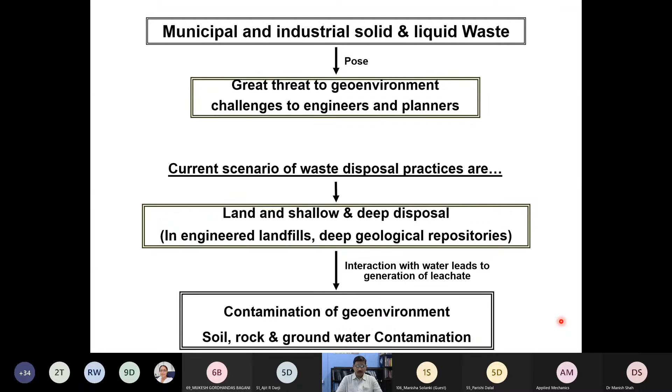If you look at the various layers in this system, we have the waste, followed by a separation geotextile, which may not be present in all cases. The purpose of this separation geotextile is to enhance the service life of the leachate collection system and prevent its clogging.

The next layer is the leachate collection system, basically a bed of gravel where perforated pipes are embedded. The main role of this is the primary leachate collection, using what is called the primary leachate collection pipe, which is a perforated pipe.

In order to maintain the leachate head well within the design level, we generally do not allow it to exceed the height of the leachate collection system—typically around 300 millimeters above the base of the liner. If it exceeds that, there are certain consequences we have to bear with, so we purposefully limit it here.

Following that is a protection geotextile layer, which could be a non-woven geotextile or sometimes a sand layer. The purpose of this protection geotextile layer is to protect the primary composite liner system, which comprises a high density polyethylene geomembrane followed by a compacted clay liner of a certain thickness, or a geosynthetic clay liner of 10 to 15 mm thick.

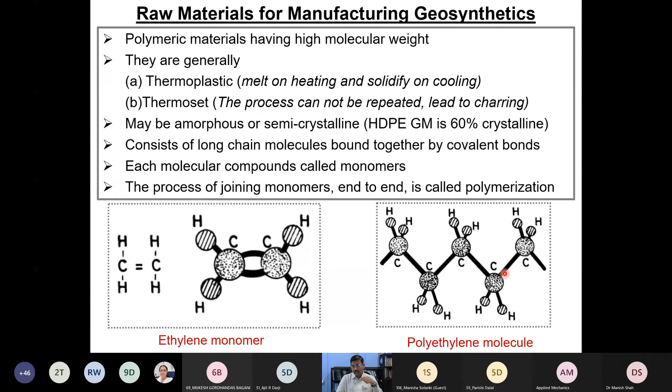The process of joining these monomers from end to end is called polymerization. Why am I talking about this? Because unless you understand a little bit of polymer chemistry - even though I'm not really interested in teaching it here - we need to know how the polymerization process is going to change the service life or aging of a geomembrane.

As I mentioned earlier, most polymers used for manufacturing geosynthetics are plastics produced through a polymerization process. For example, if you use an ethylene molecule, you get polyethylene. If you use a styrene molecule, polystyrene. An ester molecule gives polyester, and so on - we have thousands of polymers available in the industry. However, for making geosynthetics, most of the time we restrict ourselves to 4 to 5 varieties of polymers.

Examples include polyethylene, polypropylene, polyester, polyamide, also called nylon. And then we may talk about EPS, expanded polystyrene. I think all these varieties we may really talk about.

But among all these, if you are really looking at the manufacturing of a geomembrane or the geotextiles, we use two predominant polymers: one is polyethylene and the second is polypropylene. 95% of the geosynthetics are made up of these two materials, which are called polyolefins.

Polyethylene plus polypropylene are called polyolefins. Now, if you understand the behavior of these two materials from a fundamental point of view, your job is done. This depends on the polymer and the polymerization process, what physical conditions you ensure, the chemical environment, and the polymerization technique. There are a wide variety of polymerization techniques - solution phase, liquid, gas phase polymerization, even high pressure polymerization, low temperature polymerization.

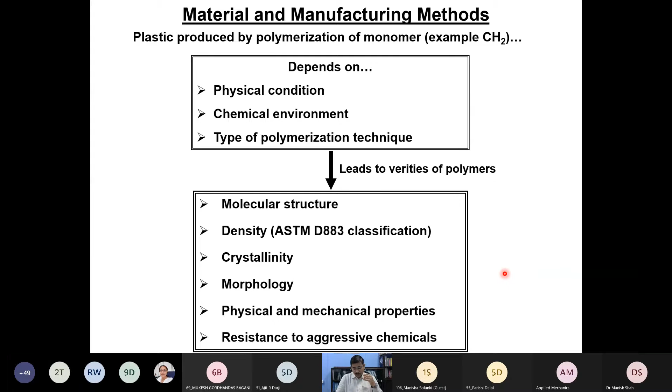All these lead to a wide variety of polymers, quite different in molecular structure, density, crystallinity, morphology. If you change all these properties, your geosynthetic material will have different physical and mechanical properties, and also different endurance against aggressive chemicals. So we need to understand how geosynthetics or geomembranes used in landfill construction are made, and also how the polymer degrades over time.

Since the polymer is made of organic compounds, if exposed to strong solvents or aggressive chemicals, they may dissolve or deteriorate over time. This may not be true when handling municipal solid waste, but if handling industrial waste containing organic solvents, you have to be extra careful with geosynthetic components, because they are made of organic molecules and may dissolve with strong solvents in no time.

Apart from that, there is physical aging. Physical aging doesn't break the covalent bonds between monomers, but the crystallinity changes. I always give an analogy between aging of a polymer and aging of a human being. Physical aging in humans starts around 30 to 35 years, but you don't see substantial change in body or physical activity till you cross 50-55 years. This is the process where crystallinity increases within a polymer.

This physical aging is actually good from a mechanical properties point of view - the stiffness of the material increases, the strength increases. But sometimes it also transforms the material failure mode from very ductile to very brittle. That's not a good sign, because the polymer may break without giving any signs of failure.

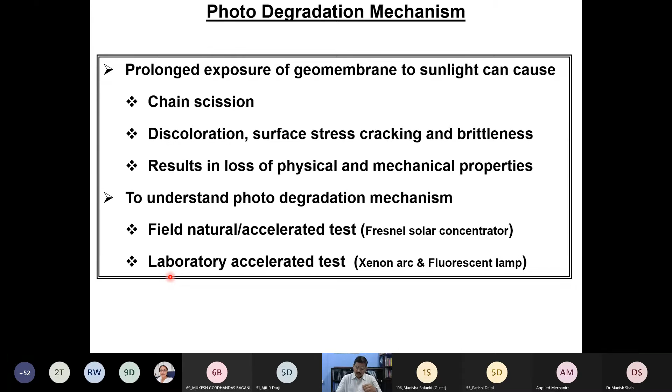We use either Xenon arc weatherometers or fluorescent lamps, because only a significant portion of the sunlight, the UV region, is going to cause degradation. So we use fluorescent lamps which can emit only UV radiation, and we can assess the photodegradation. This is one of the possible ways that people do this in the laboratory, and you need not worry about the testing methodology.

The Xenon arc weatherometer is one of the sophisticated testing methodologies, where you can expose the polymer not only to the UV region, but to the entire solar spectrum. Most of the solar spectrum is covered.

If you don't have too much money, you can go for the UV weatherometer, where you subject the polymer to UVA type, with wavelength region in the range 400 to 315, or UVB from 280 to 315. Predominantly, degradation happens in these regions.

After exposing the polymer to these UV or Xenon arc weatherometer lights, we try to see how the material property, for example tensile strength, changes after exposure to a certain exposure time. We measure the percentage fraction of the material property retained. If the polymer retains more than 80 to 85%, then you say this polymer is really good from a photo degradation perspective.

But sometimes you may not really see this kind of scenario.

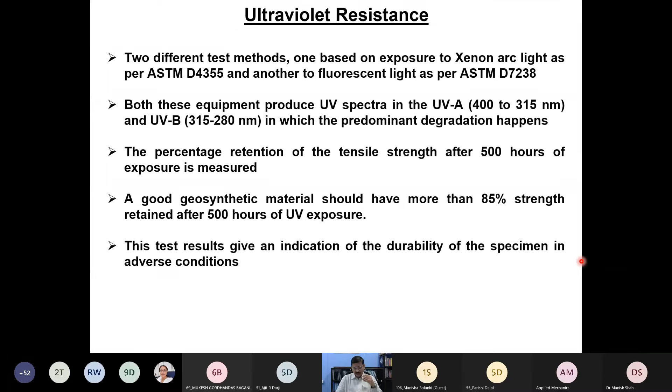But apart from that, when a black polymer, meaning a black geomembrane, is exposed to sunlight - for example, the annual average temperature of Chennai is very close to 35 degrees - but the temperature at which the polymer is subjected to aging, because of the black body radiation effect, may shoot up to around 45 to 55 degrees and above. That's why we have installed a black panel temperature sensor, in order to measure the precise temperature of the polymer.

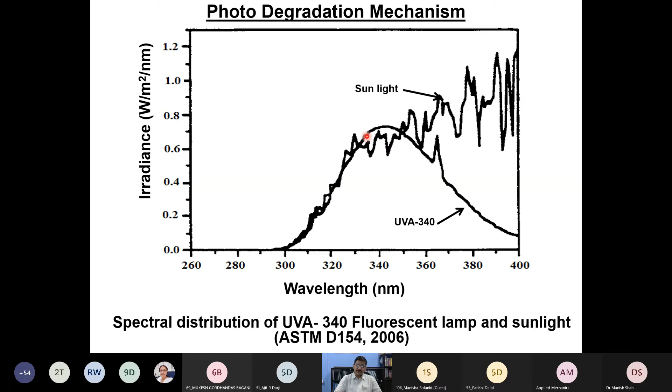If we are unable to really do that kind of long-term field exposure, because we may have to wait for a long period of time, what we can do is simulate the entire sunlight spectrum, or a portion of the sunlight spectrum. If it is UVA, a fluorescent lamp can substantially produce this kind of region of sunlight, though others we may not be able to really do. Given this, we have also purchased the UV weatherometer.

In the UV weatherometer, fluorescent lamps throw a certain radiation of the UV portion. These geomembrane coupons were exposed to the UV light. In addition, this particular system has the possibility to subject the membrane to spraying, to simulate rainwater. So we can simulate the rain effect, and we can control the temperature. Humidity we cannot control, but we can control the temperature and change the intensity. In this particular case, I set the intensity very close to 0.89 watts per meter square.

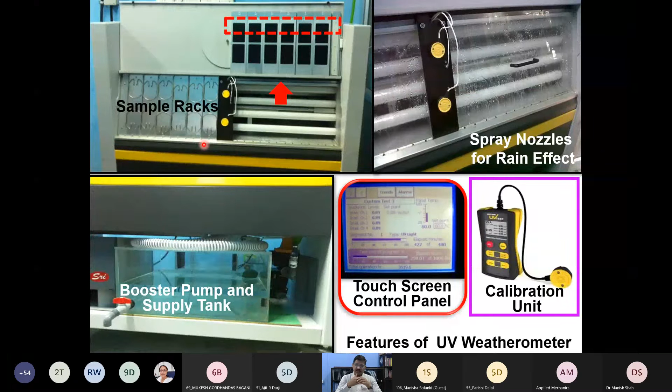We have two radiation measuring sensors here, and at the back of the instrument another two. This particular setup allows us to place around 24 pieces on either side - around 48 samples total. After exposing these materials to the UV light, we can then proceed to testing.

Recently, we got the Xenon arc weatherometer. Instead of using UV light alone, this simulates more or less the entire solar spectrum, using this kind of state-of-the-art equipment, where you can also spray water, and control humidity and temperature.

After subjecting the sample to these environments, at a given exposure time we take out the specimen. We measure the tensile property by cutting a dumbbell-shaped specimen. We can also measure some chemical properties, including OIT - oxidative induction time - and crystallinity. Let me tell you the meaning of oxidative induction time.

Oxidative induction time means that in the manufacturing process of the geomembrane, oxidation is one of the major mechanisms by which polymer degrades. That means if we want to impede that polymer degradation by the oxidation process, we add a lot of antioxidants in the manufacturing process itself.

The amount of antioxidant present in the polymer is measured by oxidative induction time using the DSC, differential scanning calorimeter. This facility we have in our lab, you can really do that.

Further, because of exposure to sunlight for a prolonged period of time, the polymer becomes subject to change. That means the molecular weight of a polymer is also going to go down. So in order to measure the molecular weight, we employ an indirect method called the melt indexer or the melt flow index. We can really measure the polymer molecular weight this way.

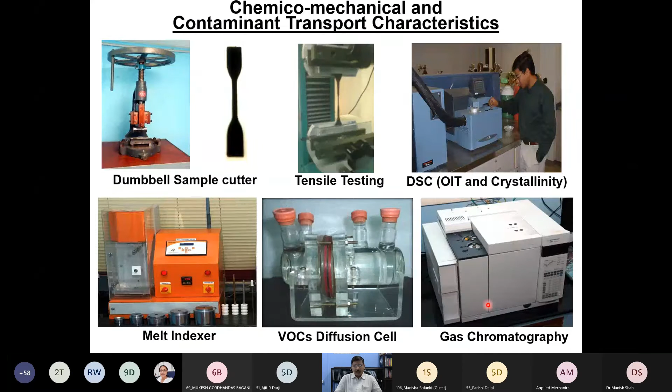So coming back to the mechanical performance of the polymer, even after exposure to a certain amount of this, you will see that the yield point and the break point didn't really change in the case of a polymer. Please note that in the case of a UV weather testing equipment or Q-UV, your sample is exposed on one side to this radiation, the other side is unexposed.

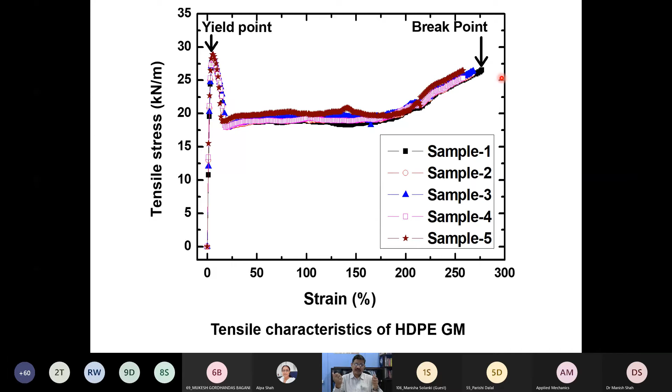So that means the weathering process always starts from the surface, and when you try to test the mechanical property, something like tensile property, the entire bulk material is going to be involved in the process. Meaning thereby, you may not really see the weathering initially by conducting the tensile test.

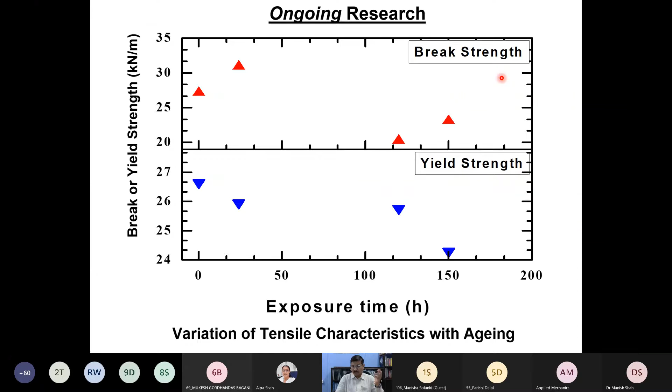In order to capture the surface level phenomena that initiated on the surface initially, and which later propagates into the entire polymer, we deploy the nanomechanical indenter test, which is basically similar to the mechanical indentation you're all aware of, used to measure hardness or some mechanical characteristics of a metal.

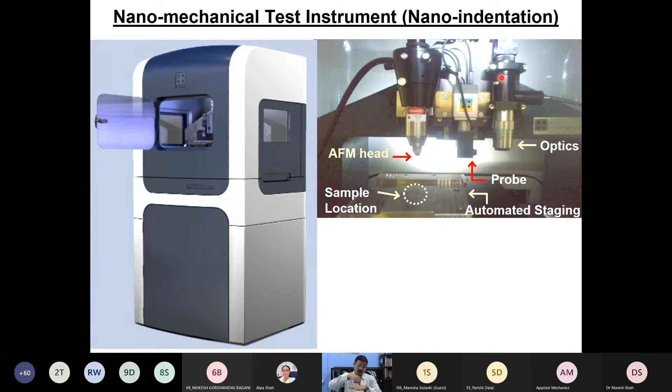The only difference with the nanomechanical indenter is that we deploy a probe made up of diamond, and this probe has a dimension at the nanometer level. That means you poke using the diamond tip on the surface of the polymer, making the depth of indentation in the range of nanometers, maximum micrometers, and the amount of load applied is also in the range of micronewtons, not more than that.

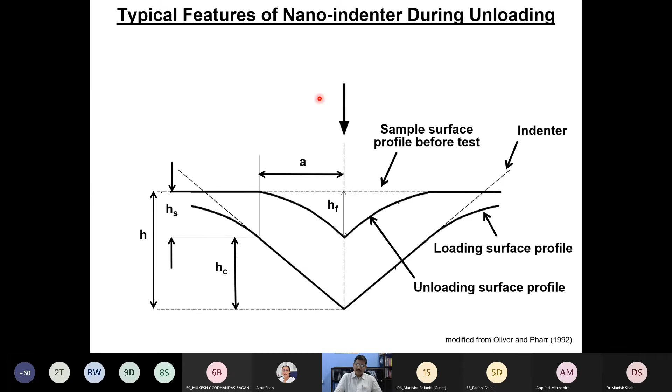How do we do that? This is the kind of surface profile of a nano indenter - this particular technique was proposed by Oliver and Pharr in 1992. So this is the initial surface. After indentation, the surface may get deformed, and then by plotting the depth of indentation versus the amount of load applied, you can really measure some of the mechanical properties of a polymer.

So we took the weathered material, whatever we took out of the weatherometers, and we did the nano indentation using this kind of facility. How do we do that?

So, by doing the nano indentation, you are trying to monitor how the hardness and modulus of a polymer is changing at the surface level, a few micrometers deep, because this is where the polymer is aging - the bottom layers may not be subjected to any kind of photodegradation during the initial period.

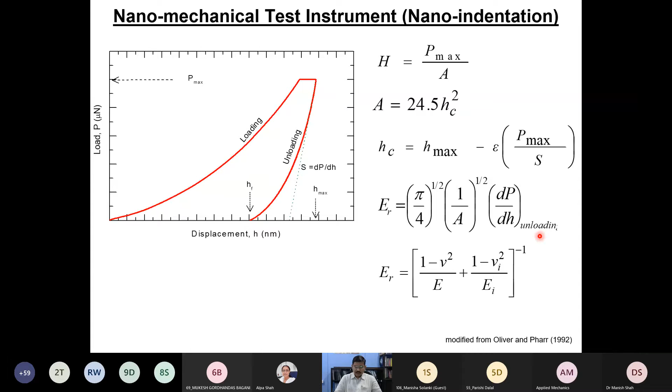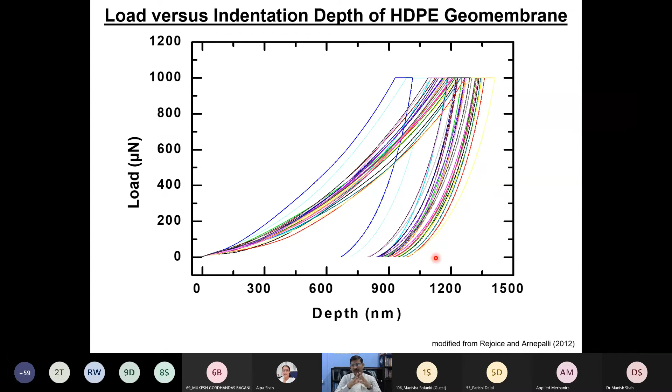At later dates, the entire polymer may be subjected to photodegradation. These are some of the nano indents we made on a small tiny piece of polymer. We made around 25 nano indentations on this, and more or less everything shows the same result. If you look at the size of the sample needed to make 25 indents, it's something like a 25 paisa coin, not more than that. So it's a very, very precise measurement we are able to do.

So we plotted the variation of the role of depth of indentation on the hardness as well as modulus. We optimized this particular depth of indentation to further investigate, and we noticed that there is a change in the modulus.

How do you really corroborate or substantiate the measured change in hardness or modulus value? For that, what we did is, if there is a change in modulus at the surface level, obviously some molecular level changes might have happened to the polymer at the surface. In order to capture these molecular level changes in terms of their functional groups, we used the FTIR, Fourier transform infrared spectrometer.

We tried to see how this absorption spectra varies as a result of the front face, which is the exposed face, versus the rear face, where there is no exposure. So at a given absorbance value, for example around wavelength 1715, if the exposed area shows this absorbance value increasing, that means something is happening to the polymer at these regions.

Once polymers degrade over a period of time, they initially have certain functional groups - for example in polyethylene, the CH functional group is more predominant. Upon degradation, the carbonyl group becomes more dominant. When the carbonyl group becomes more dominant, that means aging of the polymer is taking place.

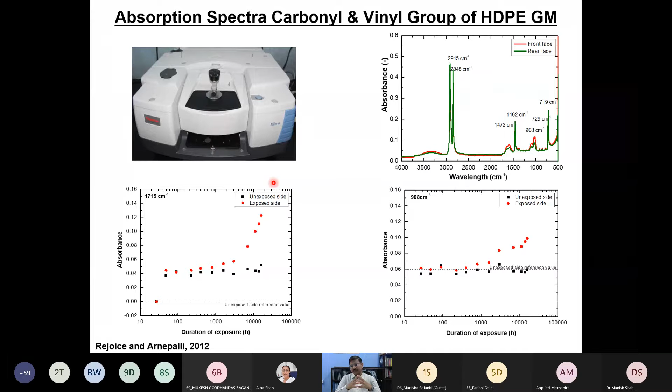This is one way - there is a term called carbonyl index. We can use this parameter to capture the degree of aging, and we try to quantify that in terms of the FTIR.

Further, we also try to see how the crystallinity of the polymer changes once exposed to photodegradation, and whether the change in crystallinity is really reflected in terms of the stress crack resistance.

There is an apparatus called the environmental stress crack resistance apparatus, which we fabricated at IIT Madras. It's a very simple test, using something like a dog bone sample. These dog bone samples are subjected to a certain amount of loading using a lever system.

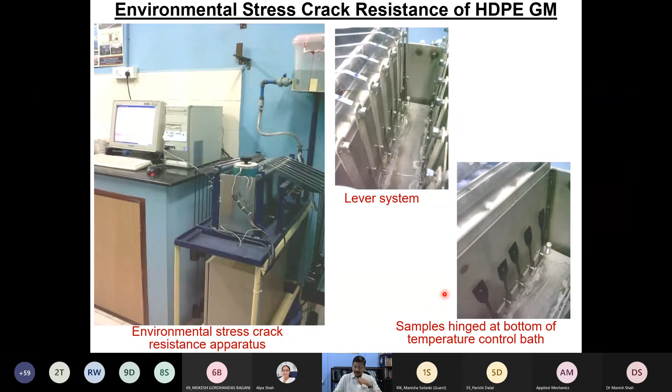Before loading, what we do is purposefully make a small tiny cut on the polymer. Then we subject this cut to tensile load, a certain degree of loading, and then we immerse the entire thing into detergent solution.

As a result, at one point in time, your polymer no longer fails by elongating a long way, but instead fails in a very brittle way, something like a biscuit. So this also tells you whether the failure of a polymer is going to happen in a ductile way or in a more brittle fashion, from a stress crack point of view.

This is also going to happen in your geomembrane when it is subjected to high tensile stresses due to indentation or any other process in the landfill. You may not be able to see the polymer has failed, but however, this phenomenon is going to happen.

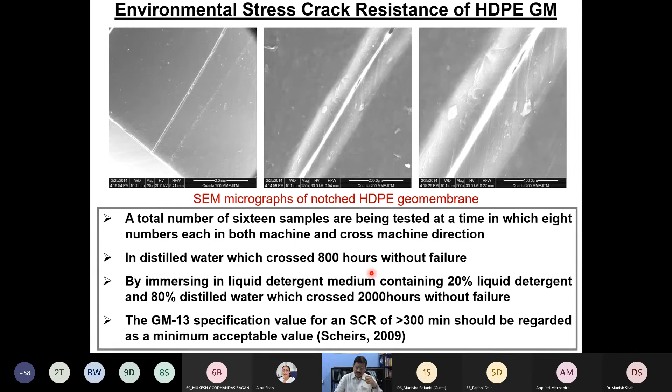So the next process - we've talked about the photodegradation process - the next process is called swelling. I told you very clearly that polymers do swell upon absorption of water. A molecular level absorption of water will take place on the surface, and that leads to the process called hydrolysis.

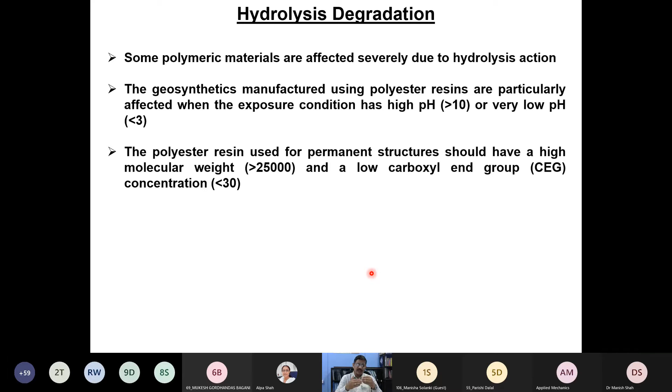This process is always very dangerous, particularly in case of polyesters. When the polyester geotextile is exposed to high alkaline or high acidic conditions, this kind of phenomena is going to be one of the crucial ones.

So till now we have talked about swelling and photodegradation. Later on we will move to oxidation. As I told you in the beginning, in order to retard the oxidation process, we deploy some amount of antioxidants in the manufacturing process.

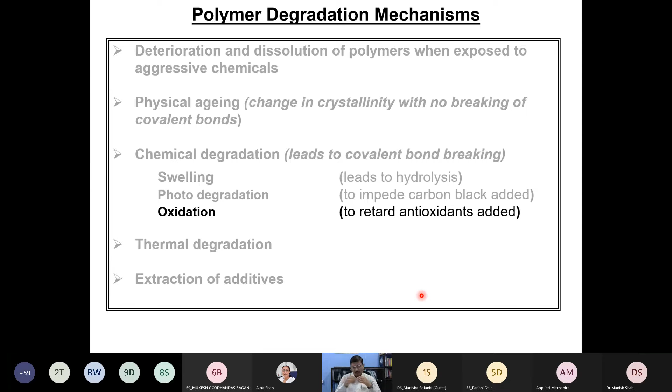In order to understand the oxidation phenomenon, let us investigate the polymeric oxidation cycle a little more clearly. In the manufacturing process, even though we are joining monomers to make long chains of polymer, the process always leaves some amount of free radicals in the polymer.

This is true even in the case of the human body. We do have free radicals, and we also age over a period of time. But at some point, our cells' rate of growth is much higher than the degradation or depletion rate. As a result, you may not see aging in a human until about 50 or 55. Afterwards, this process dominates.

So the free radicals, upon interacting with the free oxygen available in the water, or the dissolved oxygen available in the leachate, end up producing another aggressive free radical called hydroperoxide. When the peroxy radical interacts with the polymer chain, it will dissociate into hydroperoxide, and then this hydroperoxide will again dissociate into a free radical and OH minus.

Once this process starts, it is something like a cyclic process. This is called the primary oxidation cycle, and the outshoot of that is called the secondary oxidation cycle.

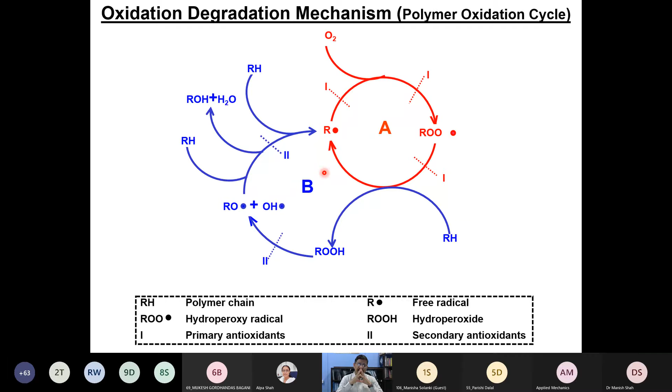In order to control these primary and secondary oxidation cycles, in the manufacturing process we induce primary antioxidants and secondary antioxidants. So we can always quantify the polymer oxidation process by measuring the quantity of antioxidant left in the geomembrane at any given point of time. This can be measured using oxidative induction time, or the OIT value.

So that is how oxidation happens in the case of a landfill. We know the process by which it can happen. But is the process the same in the case of a landfill, or if the membrane is simply immersed into a leachate of certain concentration, certain temperature, certain chemical activity that we maintain? Earlier, most of the oxidation phenomena was studied on free membranes just dipped into leachate.

However, if you look at a given landfill base, your geomembrane is not only subjected to chemical leachate, but also to thermal effects. Because of the decomposition of the waste, the temperature of the basal liner may increase to even up to 85 degrees. This is quite possible; 55 is quite common.

So that means your membrane is subjected to aging because of the physical loading caused by the weight of the waste, the thermal loading from the decomposition of the waste, and the chemical loading from the leachate composition. This means you need to investigate the combined influence of physical, thermal, and chemical loading — the synergetic effect needs to be taken into account.

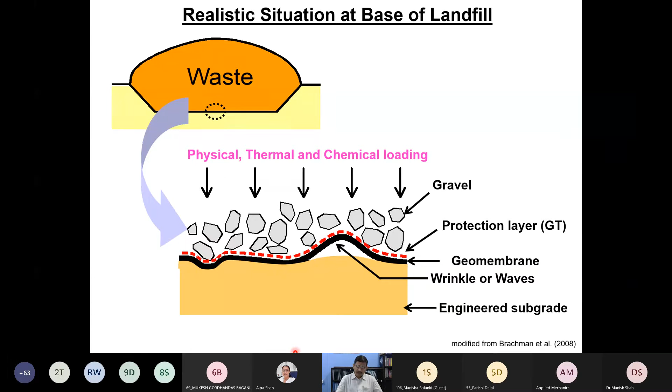As a part of my postdoc at Professor Kerry Rowe's lab, we developed this facility called a geosynthetic liner longevity simulator, called GLLS. This facility is basically a pressure vessel, a metallic body, almost 0.5 to 0.6 meter diameter and 0.5 meter height. The weight of the entire cell, after putting everything together, may be very close to 1.2 ton.

But the beauty of this particular cell is you can simulate the various proportions or configurations of your liner system.

I can simulate a wrinkle. I can place the leachate collection system and maintain the leachate head well within the zone, and we can recirculate the leachate the way it happens in the landfill. We can maintain the temperature of the geomembrane and other components using a heating cable, and afterwards we put a nice insulation jacket. The physical loading we can apply is up to around 1.2 megapascal.

In order to do that, a rubber membrane has been placed. By inflating the rubber membrane, we push the gravel particle downward, and as a result we can measure the level of overburden pressure acting on the membrane.

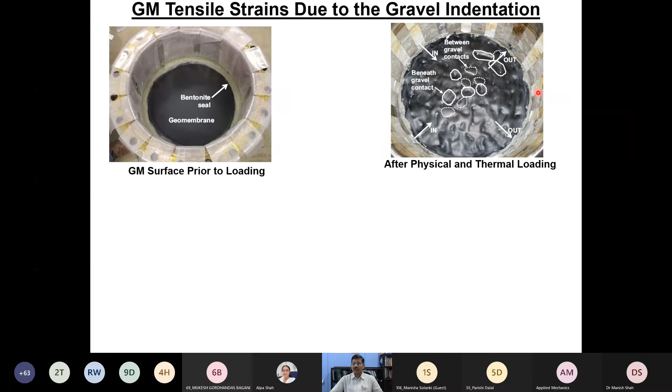So meaning thereby, we want to really see what happens for the indentation, because the gravel particle is pushing and the indentation is formed. Suppose we want to measure the strain below within the geomembrane - how do you capture that? Because if I remove the load, due to elastic rebound, the geomembrane will go back to the original position, or at least rebound a significant portion of the strain.

To capture the in-situ strain, we placed a lead sheet below the geomembrane. When indenting, the geomembrane pushes the lead sheet downward, creating indentations. So even after removal of the load, the geomembrane may rebound back, but the lead sheet does not rebound. We capture this by freezing it into plaster of Paris, and using a line laser we digitize the indentation. Then, using a protocol proposed by Rowe and others, we capture the tensile strain within the geomembrane.

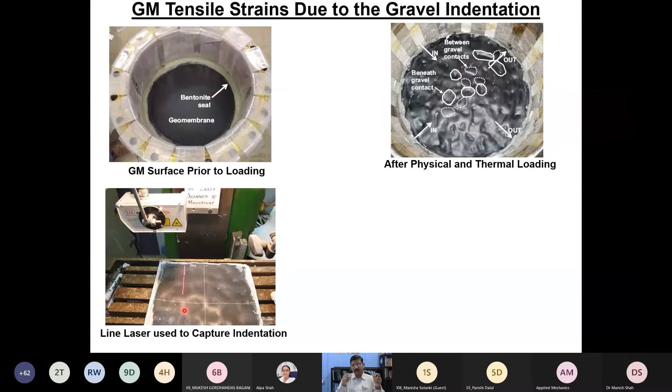If you notice, the maximum tensile strain in a geomembrane varies with respect to temperature. That means if I test a membrane at 20 degrees, I have a maximum tensile strain of 11%, but the same geomembrane subjected to 85 degrees gives a strain close to 20%.

You may say that 20% strain is nothing for a geomembrane. That is true if the membrane is virgin geomembrane - the original membrane may be able to fail at around 200 to 300% strain. But once the membrane starts aging, even 20% strain is good enough to crack the membrane through stress cracking. That is the reason why we really investigated this.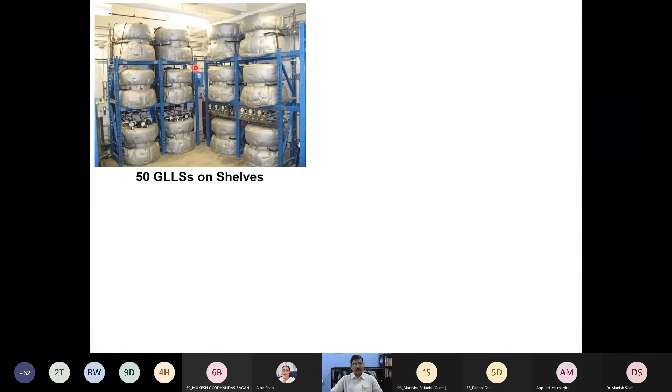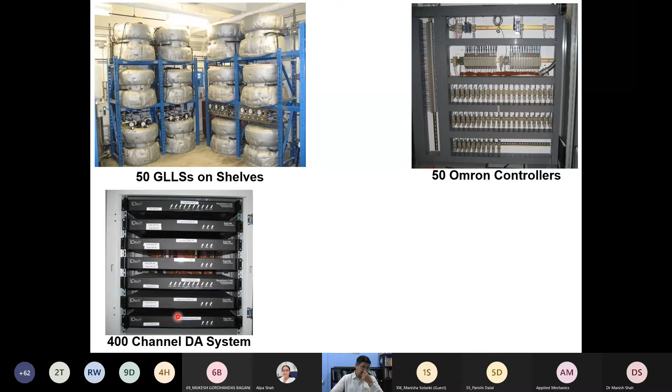Like this, we have tested around 50 of them. We used around 50 Omron controllers because we wanted to test wide varieties of temperatures, and we also monitored these temperatures. Almost every cell had around 8 thermocouples erected, and these were all connected to a 400-channel data acquisition system we deployed. Fortunately, I'm able to monitor this data acquisition system even while sitting at home.

These are the temperatures at which I conducted the test. One is 85 degrees - I was supposed to maintain it at 85, but it would go up to 85.4, 82.6, something like that. We tested a wide range of configurations, wide range of temperature conditions, leachate recirculation states, and wide range of applied pressures.

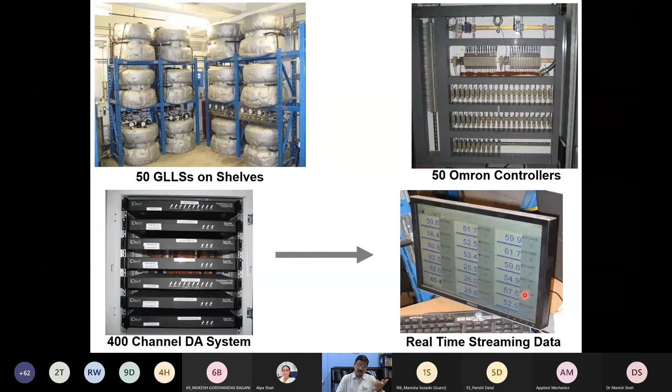As a result of this, after taking out the geomembrane, we also measured the OIT using a DSC. It's a very, very simple test - nothing very elaborate.

In the OIT test, we increase the temperature of the geomembrane at a constant rate until we reach 200 degrees. Up to that point, we maintain a nitrogen environment. Once we see a constant temperature, we induce oxygen. Because of the oxidative nature of the oxygen, at one particular point we see the oxidative curve.

The time elapsed between the start of the oxygen injection and this point is called the OIT value. Once you know the OIT, you can tell if antioxidants are significantly present - then this OIT time is prolonged. If the oxidative time is really, really short, that means the antioxidant present in the system is very low.

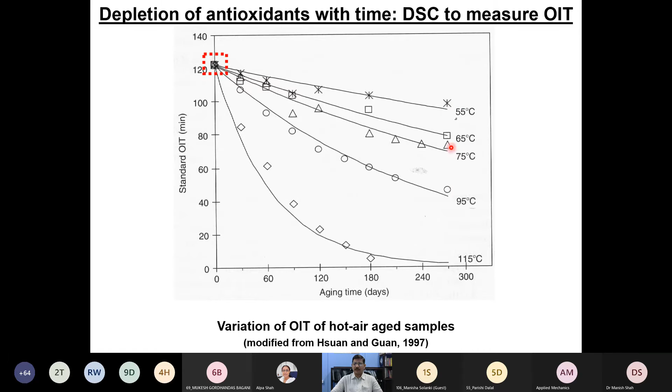So basically, why did we do this at various temperatures? Because if I conduct a test at 25 degrees, I may have to wait my entire life to see a significant change. By increasing the temperature, we tried to see accelerated aging, and by using Arrhenius modeling, I can always back-calculate what can happen at 20 degrees or 10 degrees. So this is the concept we used.

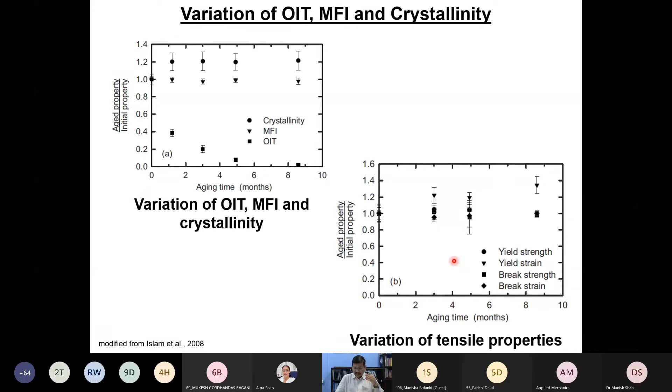Not only the OIT - the melt flow index, molecular weight, and crystallinity were also measured, and we also measured the yield strength and break strength. All these things were measured, and by taking all of this into account, we can back-calculate the service life. How do you back-calculate it?

To calculate the service life, we use the 3-stage conceptual model proposed by Grace Hsuan of Drexel University. What she proposed was a very simple concept: your service life has 3 components - T1, T2, T3 - something like your life: childhood, middle age, and the latter stage. Basically, T1 is the time to deplete the antioxidants.

Initially, antioxidants are significantly present in the geomembrane, and this significant portion gets depleted. But when the antioxidants in the geomembrane become 0, that doesn't mean the geomembrane immediately loses its mechanical property, or loses its diffusive property, or loses its melt flow index, or loses its crystallinity.

What I mean to say is, if you look at a parameter like tensile strength, you have one service life. If you look at crystallinity, you have another service life. With respect to melt flow index, there's another service life. So you need to see which is the critical path by which the membrane is going to lose its integrity. After the loss of T1, there is an onset time - this is something like going from 35 years old to 55 years.

You will not see any kind of degradation. Then after 55, you know that you will ramp down in its material property change. Same thing happens in human beings also.

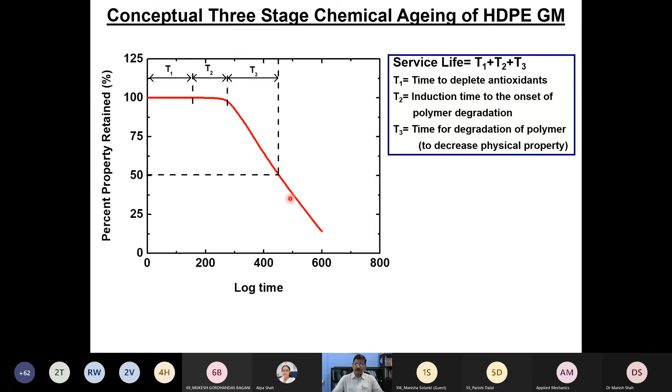By knowing all these things, we can back calculate the service life of a geomembrane. These are some of the service lives predicted by Professor Rowe and Rimal. If a membrane is subjected to 20 degrees, some geomembranes can last even 1500 years. You may be wondering if this is really true or just a fluke, but actually, if you use a proper geomembrane, a proper polymer, we can really guarantee at least a couple hundred years without any worry.

The same geomembrane subject to 35 degrees, the service life drops down to 310 years. When the geomembrane is subject to 50 degrees, which is quite possible in North American landfills, the service life goes down to 80 years.

Now, can you project this for India, where the groundwater temperature is generally 20-25 degrees? If significant biological waste is present in your landfill, your temperature may be subject to 80-85 degrees. If it's 80-85 degrees, your service life is only 30 to 35 years, or maybe less. If you use a poor quality geomembrane, obviously you cannot really do anything about it.

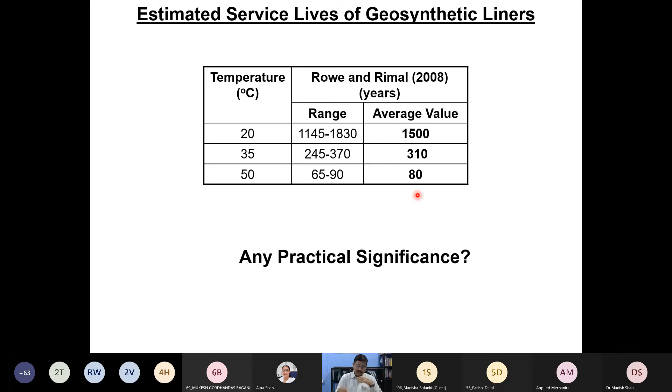Based on this, till now we measure the service life. What will we do with the service life? Do we simply say 80 years and stop there, or do we want to take it forward? Of course, we take this predicted service life to see how the contaminant impact is going to vary with respect to it.

We go back to the same liner. Just for understanding, I have considered a single liner system here: a geomembrane, a GCL, an attenuation layer, and an aquifer. By changing the service life of a geomembrane, we look at how a model contaminant, something like an inorganic contaminant such as chloride, or an organic contaminant commonly present in landfills such as benzene, is transported within the liner system as the membrane ages over time.

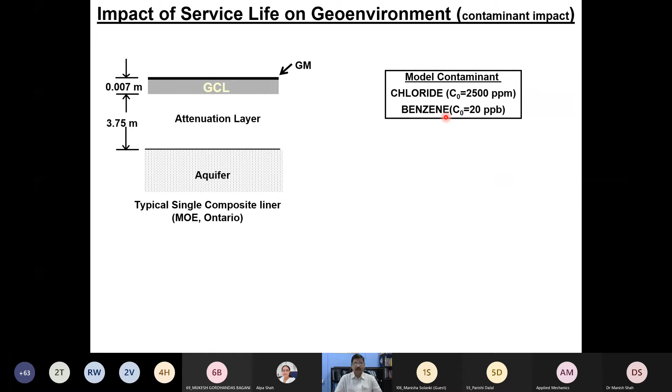In order to do this, how do you do that? We simply need one advective-diffusive equation. This partial differential equation, if you look at it up to this point, is something similar to our one-dimensional consolidation equation: du/dt equals a constant term times d²u/dz². There is no difference between the contaminant transport equation and the one-dimensional consolidation equation.

Now, how best can we predict the rate of change of contaminant with respect to time? It depends on how best we can back calculate and measure the constants in this equation. This is basically a diffusive term, where D is the diffusion coefficient or hydrodynamic dispersion coefficient, and V is basically the advective velocity, involving permeability, where K is basically the retardation coefficient or partition coefficient, and lambda is the degradation coefficient. For example, in organic contaminants, they degrade by themselves, and there is a half-life based on this lambda. For organic contaminants or radioactive decay, we can see this decay term.

By measuring all these parameters and how they change with aging, and then plugging them in, incorporating all these effects, we can determine what the contaminant impact would be at the site boundary within the aquifer. If you can measure it, then you are successful in quantifying the service life and back calculating it.

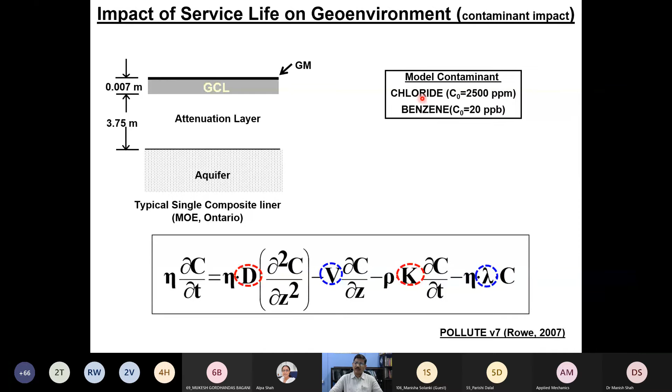In order to do this, my next part of the presentation will focus on how to measure these parameters: how to measure the diffusion coefficient, how to measure the advective velocity, how to measure the partition coefficient. In the case of a landfill, we may have to worry about this only for benzene, but for chloride this term becomes zero and drops off. So let us look at this. The first term I'm aiming at is K, the distribution coefficient or partition coefficient. We commonly perform two varieties of tests.

One approach is batch sorption experiments, or the column flow through experiments. In case of a batch sorption experiment, it's very, very simple.

What you do is you take a bottle and put some amount of the material of your interest, the sorbent, either soil or geomembrane or whatever it may be, and fill it with the contaminant of your interest. Then you keep shaking for some time, allowing a certain amount of sorbent-contaminant interaction time, and at the end of that interaction time, the equilibrium time, you separate the sorbent and the sorbate.

Then what you do is try to represent that a particular amount of contaminant has been transferred from the liquid state to the solid state, or the solid state to the gaseous state, whatever the case may be, and you represent this using theoretical sorption isotherms.

This will give you the sorption affinity of a contaminant in terms of the retardation coefficient, or in terms of the sorption or partition coefficient.

These parameters vary depending on the concentration of the contaminant, sometimes the sorbent type, pH value, and temperature. Of course, the moment you call it isotherms, temperature is constant, and if it is a soil, the liquid-solid ratio also changes.

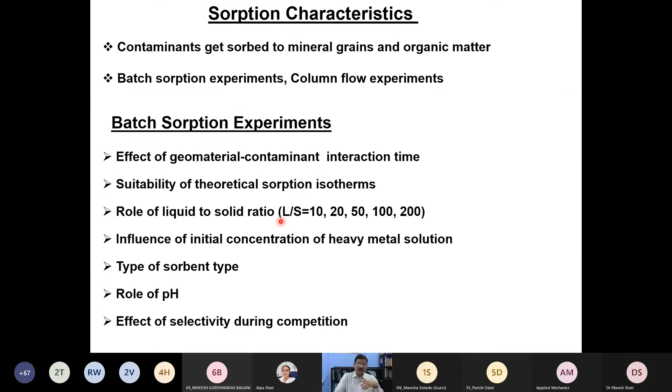So what we did is, in order to get the equilibrium interaction time, we asked what time you need. It depends on the type of sorbent, the nature of the material. For example, in case of a geomembrane, you may be able to achieve equilibrium within a short period of time.

Meaning, you take a contaminant, for example 100 ppm in solution, put a soil or a geomembrane in it, and then try to see how the solution concentration varies with respect to time.

Over a period of time, what we noticed is around 96 hours is really good enough. So for the remaining tests, we conducted using a 96 hour interaction time.

At the end of the day, you initially have a certain concentration in the leachate, in the solution phase, Ci, and at the end of the interaction time you have the equilibrium concentration, CE. The difference between Ci and CE is basically what has been transferred into the solid phase, and multiplying by the liquid-solid ratio gives me the concentration in the solid phase.

Once I know the concentration in the solid phase, and the equilibrium concentration in the liquid phase, if I correlate these two parameters linearly, it's called a linear sorption isotherm, where you call it a KD parameter. If it's non-linear, we may say it's a Freundlich isotherm. If it's something else, we may see a Langmuir isotherm.

The selection of isotherm depends on the nature of the interaction between the contaminant and the sorbent. At the same time, it also depends on the surface characteristics of the material to a certain extent.

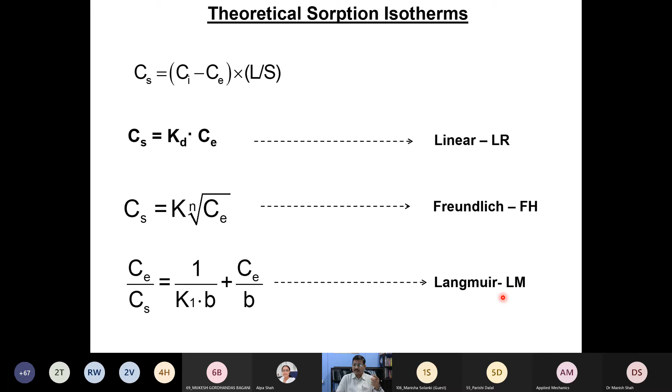Anyway, you need not really go through that detail, but we want to assess what kind of isotherm is really best suitable for a given contaminant. One kind of contaminant we used in this case is, I think, one of the heavy metals in soil.

So we tried to represent it in terms of the linear isotherm, Freundlich isotherm, and Langmuir isotherm. By looking at the regression coefficient as well as the best fit parameters, we noticed that the Freundlich isotherm is good to represent the geomaterial-contaminant interaction, since it is a soil.

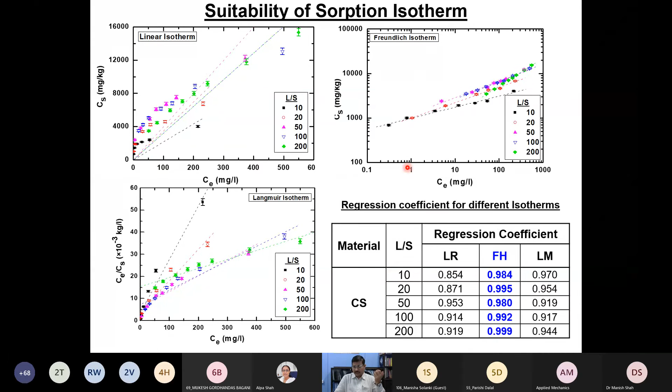But in case of a geomembrane and an organic contaminant, most of the time we may be very happy with the linear isotherm, or very seldom we may go to the Langmuir, but otherwise it is one simple way. The drawback with these batch sorption experiments is that, because they are very simple and easy to conduct,

they may not represent the realistic contaminant-sorbent interaction very precisely. The contaminant migration in real life is more like the flowing of water through a column of soil, or a column of a liner. So in order to capture that, column sorption experiments, or column flow through experiments, are commonly conducted.

Since the hydraulic conductivity is very low, sometimes these materials also have very high sorption. Even though 1000 ppm is going in, most of the material is getting attenuated within the system. As a result, you may not get anything out of it, so you may have to conduct column experiments for maybe 5 to 6 years.

It's very difficult. In order to avoid this problem, what we did is try to accelerate the process using a geotechnical centrifuge. We didn't really accelerate the sorption phenomena, but we accelerated the flow rate - we were able to accelerate the seepage velocity.

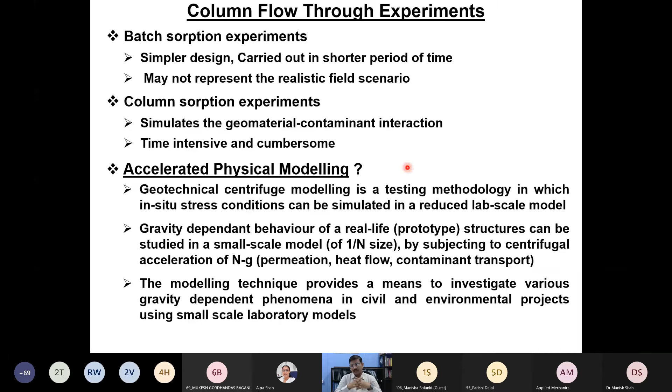We assume that even under the accelerated seepage velocity, the contaminant interaction time and the effect of time is not really reflected from the contaminant transport properties point of view. In view of this, what we did is simple geotechnical centrifuge modeling.

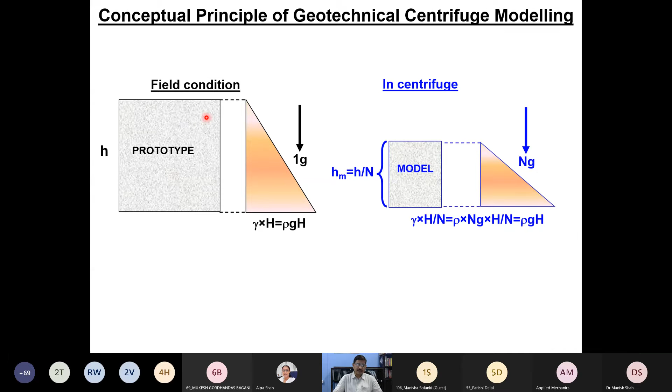You might have seen this kind of graph before. We can take a small model and subject it to N times gravity, and then effectively we can simulate the stress condition the same as the prototype, and that's how we did it.

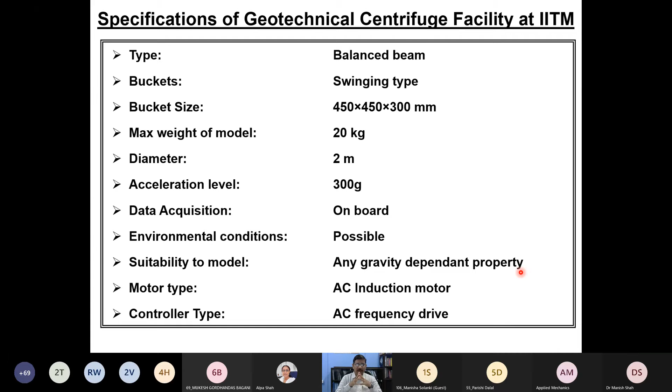For this purpose, we used a bucket, balanced beam centrifuge, having a diameter of 2 meters at IIT Madras, and we deployed this particular centrifuge. The centrifuge looks like this, and this is a viewing window - there is another viewing window, and internally, if you look at it, the bucket looks like this.

The bucket has a size of about 0.5 meter by 0.5 meter, where we placed around 10 column flow-through experiments with the liner material, where the contaminant is allowed to stagnate above it. Once it is subjected to the accelerated environment, the effluent is collected. Once you get the effluent, we normalize the effluent concentration versus the influent concentration.

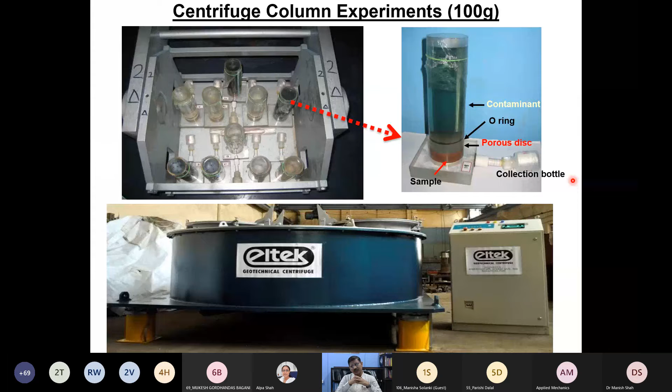Ct by C naught versus time - if you look at it, this is called the breakthrough curve. Once you have the breakthrough curve, you get the retardation coefficient, and you can also get, to a certain extent, the diffusion coefficient.

We also conducted experiments at the 1G level. In order to enhance the hydraulic head, we placed the reservoir at the top, around 2.5 meters above the ground surface - these are all simple column flow-through experiments.

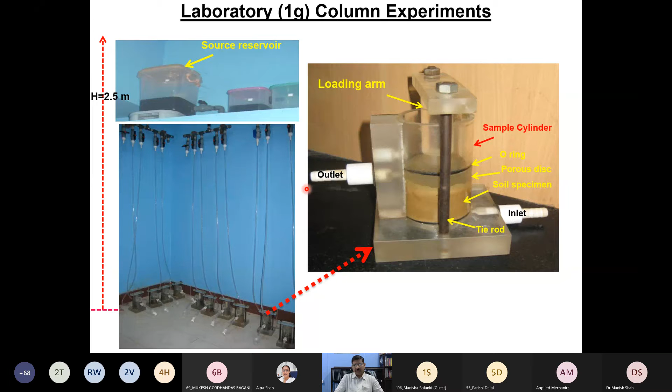The inlet from this tube is connected at the bottom, and I allowed the contaminant to flow in the upward direction because we want to avoid any sidewall leakage. The outlet is collected using a small tiny bottle, and this effluent water is analyzed for concentration over a period of time.

For example, in a 1G environment, the effluent concentration is measured with respect to time. Please note that we measured this for different varieties of soil, but in case of geomembrane, we measured it again for organic contaminants.

So at 1G, even after 300 days, for example in case of chromium, the Ct by C naught seldom reaches close to 0.1. In order to get any meaningful parameter from this breakthrough curve, you need to project the value of Ct by C naught to at least reach 0.5.

Can you imagine how much time it will take to reach 0.5? Maybe at least 4 to 5 years, cannot be less than that.

In view of this, what we did is, since we know the seepage velocity and the time at which we collected the sample, we converted the same data in terms of pore volume. What is the meaning of pore volume?

Pore volume is basically related to the porosity of the system, the void volume of the sample - you know how much quantity of water is collected. If you normalize the water volume versus the pore volume of the void, this becomes pore volume. This is very much needed when you want to compare the breakthrough curves obtained from the 1G environment versus the 100G environment in the geotechnical centrifuge - then we got the same kind of response.

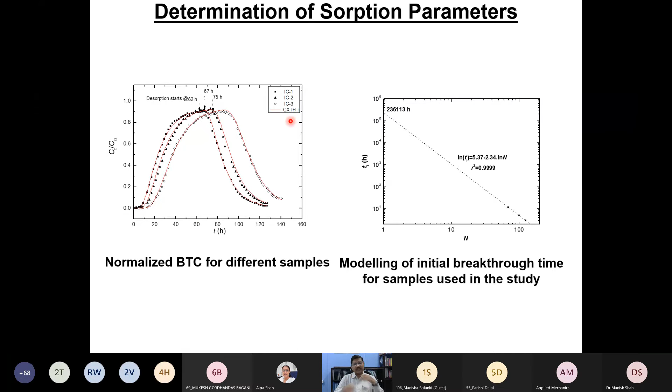Because we cannot really wait for many years in a 1G test, we want to really correlate the response. We have also conducted the centrifuge test to see the effect of G, and then tried to see how this value is really going to change. If I present it in terms of pore volume, I have more or less the same kind of response. That means whether I conduct a test at 100G or 150G or 75G, my breakthrough curve is not really going to vary too much.

That means that knowingly or unknowingly, we are able to really model the contaminant transport by using a geotechnical centrifuge. Because anyway, I don't really need the desorption curve at all - I am more interested in this. So by using this data, what we can do is back calculate by fitting this theoretical curve, and I can get the KD parameter.

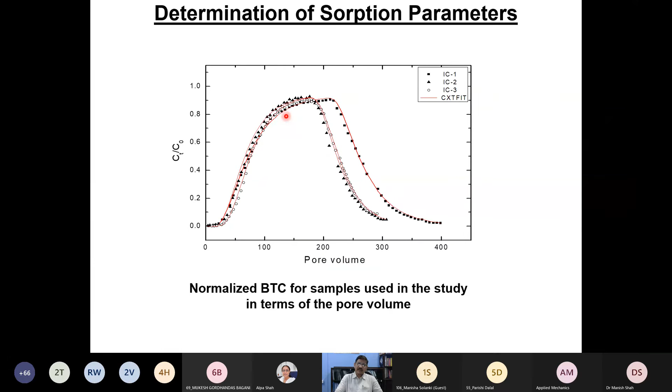If I look at it, we have 3 KD parameters. One is the KD parameter from the batch test, which is very, very simple. We also got the KD parameter from the centrifuge. We correlated the KD parameter from the 1G test in the column flow through experiment versus the centrifuge, and we noticed that these two are matching very well.

What we did is, the KD value we got from the centrifuge, we took as the real value, and then we tried to normalize the batch versus this one, and see how it is really going to change with respect to the liquid solid ratio. By knowing this average KD ratio, then by fitting an experimental curve, what we got is an empirical equation with constant parameters A1, B1, C1.

These A1, B1, C1 are related to almost 5 varieties of soils representing a broad range - even from quartz sand to bentonite, two extreme cases. And then we have taken 5 varieties of contaminants, and these values are really matching well.

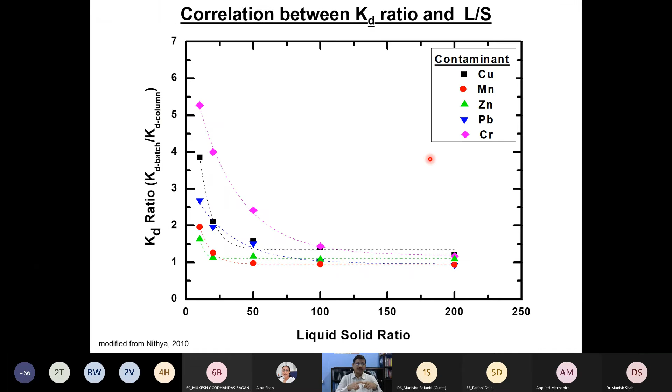So what I want to show you here is: you conduct a batch sorption study, which is very simple. You don't need to conduct a column flow through experiment, but by using this kind of empirical relationship, you get the KD ratio. That means that KD ratio is basically batch versus column for a given liquid solid ratio. Then you get a constant value. Once you have a constant value, you convert your batch sorption KD into column sorption KD.

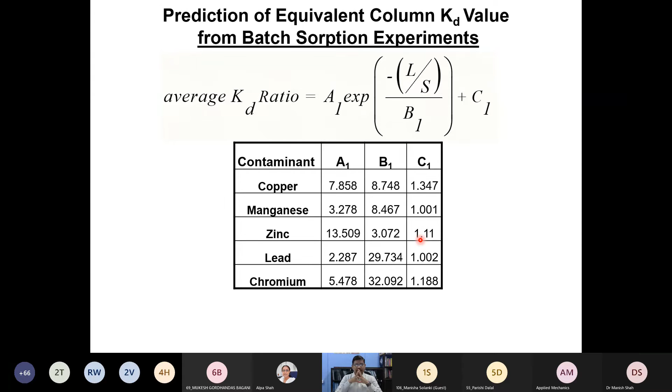So effectively what we are trying to say is, you need not conduct a column flow through experiment, which is very time consuming. You try to conduct the experiment in batch sorption instead. Then, by using the methodology proposed in this particular work, you get the representative value. If you look at the basic equation, one is the sorption term, the second one is the diffusion term.

But we didn't want to wait this much time. In addition to the chemical flux, we also applied some amount of electrical flux across the sample - this is work done by one of my master's students. By applying different voltages, we were able to pull the ion from one side to the other in a very quick fashion.

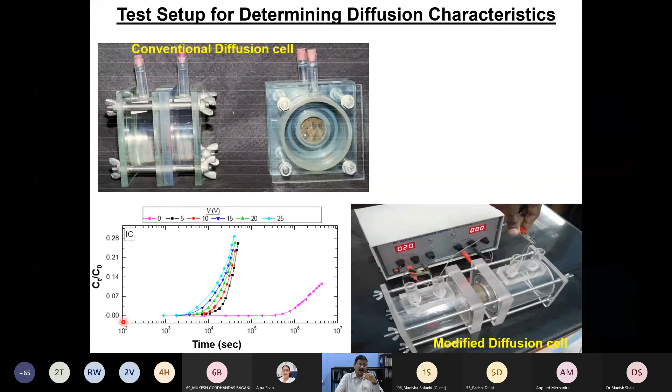Now you may ask, is this setup giving a diffusion coefficient? It's not going to be called a diffusion coefficient, it's basically a permeation coefficient. Once you have the permeation coefficient, we can back calculate the diffusion coefficient. By applying voltage, the same phenomena can be finished in a short period of time, using this modified cell where a chemical gradient is imposed in addition to an electrical flux imposed against it.

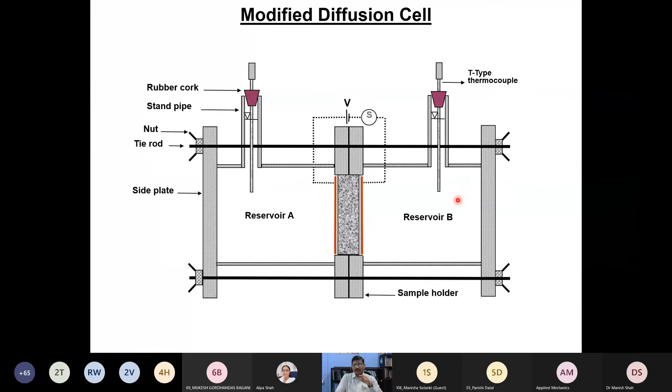We can monitor the T-type thermocouple temperature of both chambers. We maintain the leachate head more or less constant across the cell, meaning the hydraulic gradient is 0. That means the contaminant migrates from source reservoir A to reservoir B only by the process called diffusion.

By knowing this, we can back calculate the advective velocity from the same flow-through column studies. We know the diffusion term from the diffusion test. We know the term K, the partition coefficient or distribution coefficient - people use different terminology depending on the type of isotherm used. And we know the decay coefficient of a given contaminant if it's an organic contaminant.

By knowing all these parameters, mathematically we can back calculate what happens to the concentration of chloride and the concentration of benzene if the geomembrane service life varies anywhere between 40 years to almost 730 years.

Now you can see very clearly how the service life predictions we made, by understanding the mechanisms of aging phenomena, were transformed in terms of contaminant impact. Using this study, we can say that if the geomembrane fails within 40 years of installation, the peak concentration of both benzene and chloride really change. So this is what we have to really do.

Now we learn that geosynthetic liners are really good in safeguarding the geoenvironment. Can we dream of deploying these materials to contain, if not high level radioactive waste, at least low level and intermediate level radioactive waste using a multi-barrier concept? Can we use it? I think we can, because now we have a good understanding of the polymeric science of geomembranes and GCLs, and how to really do that.

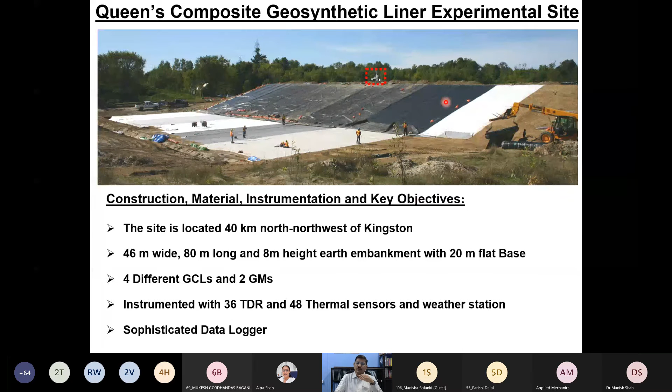So we have a sophisticated instrumentation tool here, and in the first slide you can see at this particular site we did quite a lot of experiments, not only from the geomembrane aging performance point of view, but also how the wrinkles of a geomembrane are going to be addressed.

In order to address the geomembrane wrinkles, what we did is we filled a balloon with helium gas, attached a camera using a remote control, and let the balloon go up almost 60 meters. You can see these 2 PhD students who did this work, and the images taken from 60 meters above show something that looks like a dot.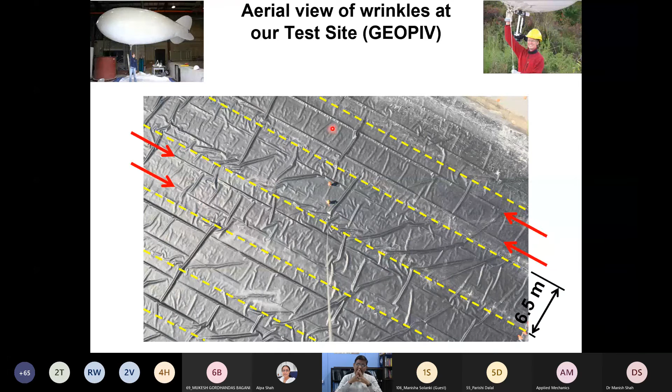But basically we captured the entire wrinkle pattern using a digital image analysis processing technique. We captured how the wrinkles are connected, how they form, and what is the impact of these wrinkles. So these are some of the images.

We rip the geomembrane and GCL at regular intervals of time in order to test some other properties. Based on this, we have shown very clearly that the liner is going to perform very well in laboratory conditions in a very controlled fashion.

We have also gotten more inputs from the field data, and we said that this liner is really good, provided you use a proper liner material. Otherwise, it's going to be bad.

We cannot really say based on this work that all geomembranes are long lasting for 80 years. If the membrane is not really made up using a proper composition and proper chemical properties, eventually your membrane may rip within 5 years. There is no doubt, you don't expect anything more than that.

That means while selecting a geomembrane or a GCL, from a polymer chemistry point of view, not the physical property, not the mechanical property, you have to really give high priority to the chemical properties. One is crystallinity, melt flow index, OIT value. All these 3 parameters relate to stress crack resistance. These are the crucial parameters when compared to the tensile strength.

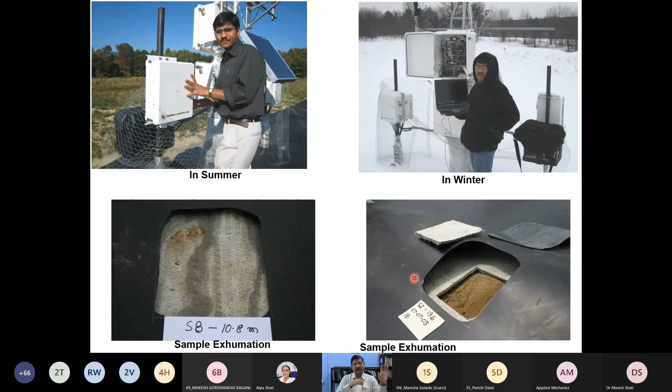Tensile strength comes out of the polymer matrix. Everybody uses the same polyethylene, but only the 5% to 10% antioxidant package decides the cost of the geomembrane and its service life, not the 90% backbone resin. The backbone resin, anybody can fabricate.

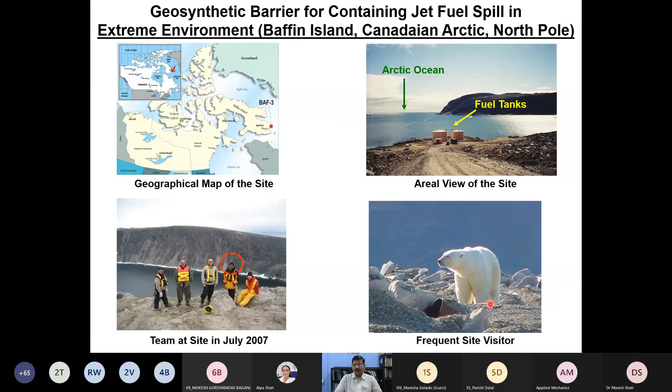In addition to that, we deployed the same geomembrane and GCL in a very harsh environment in the Arctic zone, where fuel tanks were installed by the military for their operations. These tanks were leaking, and as a result the fuel went into the Arctic Ocean, and we wanted to prevent this. We visited there during the 2007 summer, myself and the team, and the only frequent visitor was the polar bear, no one else.

So these are the oil tanks shown in plan view, and the plume is really migrating in the downward direction. As a result, it met the coastal region and completely contaminated it. In order to prevent that, we made a barrier just to contain the plume, so that afterwards we could come and do the remediation process.

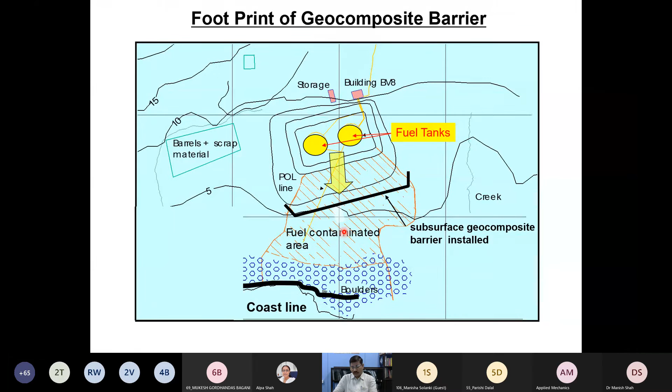Only the soil above the permafrost region is contributing to the contamination of the ocean. We contained it here, and now this particular liner is performing very well, even after installation of around 10 years. So it's really good.

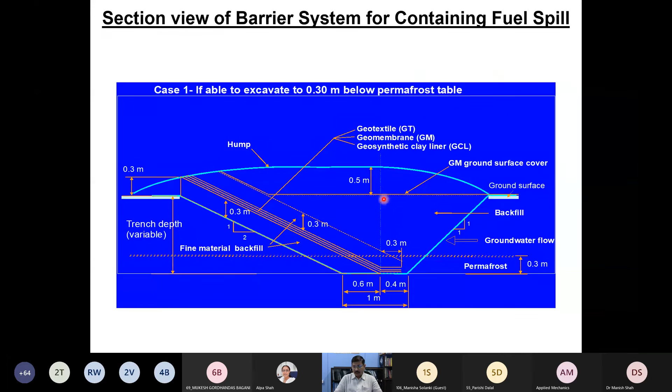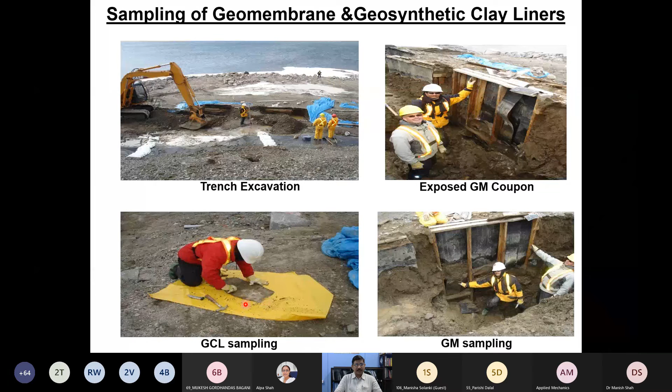With this, I came to the conclusion summary. We know that the efficiency of any engineered landfill primarily depends on the durability of the geomembrane liner, and oxidation seems to be one of the major mechanisms. We have also developed a unique apparatus called GLLS, which is capable of simulating liner aging by considering the combined effect of all possible mechanisms.

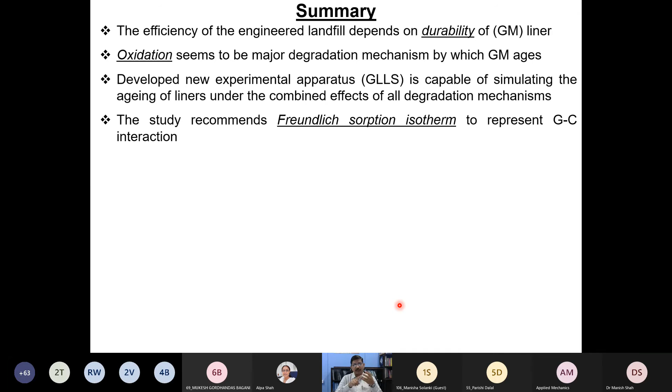We have also shown very clearly through this presentation that the Freundlich sorption isotherm is very good to represent the geo-contaminant interaction, particularly for heavy metals. We also demonstrated accelerated physical modeling using a geotechnical centrifuge to model contaminant transport and get the sorption parameters quickly, in a short period of time.

We also propose generalized relationships to obtain the sorption parameters simply by conducting batch sorption experiments, so that you can correlate back and predict what the sorption coefficient would be when you conduct column sorption experiments.

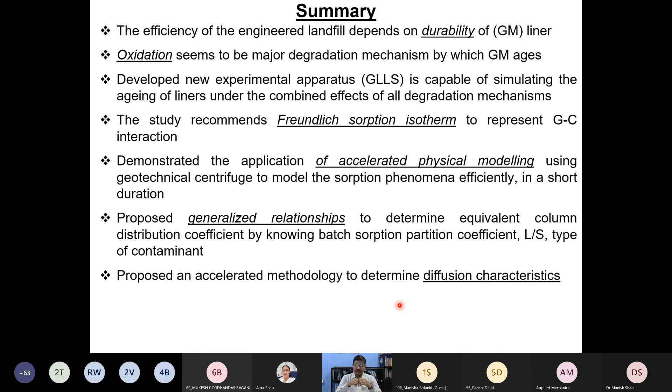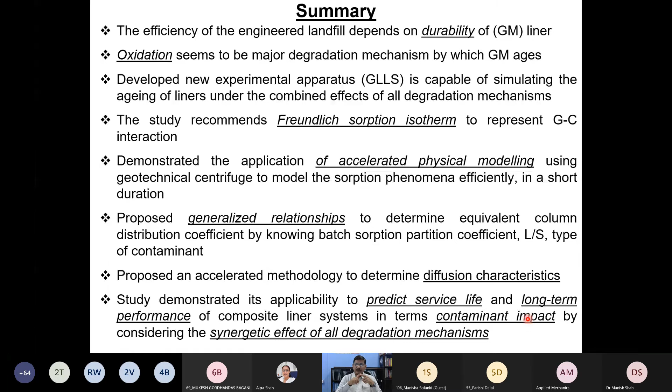We propose the accelerated diffusion methodology to get the diffusion coefficient, and then we demonstrated very nicely how to predict the service life, and how service life prediction really impacts long-term performance and contaminant impact, considering all synergetic environmental conditions and degradation mechanisms we have conducted.

With this, I wish to thank my research group, the Geo-Environmental Group at IIT Madras, and acknowledge some of the pictures and graphs I have taken from my collaborators, or directly from textbooks. I wish to acknowledge them, and thank you very much for your patient listening.

You may already know most of the stuff I have discussed, but however, I wish to really thank you all. So with this, I'm done.

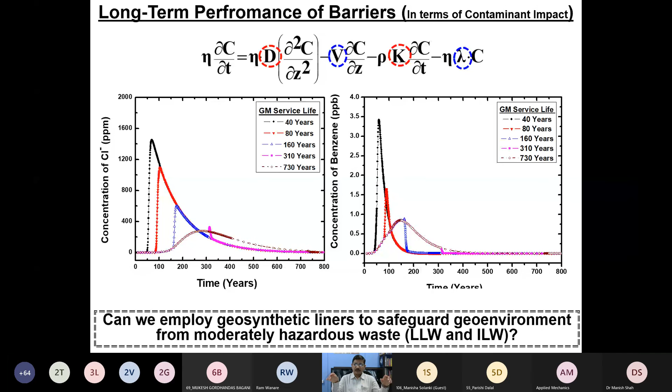Okay, now if you look at this particular response of the material, we captured it not only considering the service life of the membrane. In fact, we have incorporated the variation of temperature of the basal liner, at the base of the liner, over a period of time. Because, as you rightly mentioned, the temperature within the landfill is not constant - that is very much true. Even you need not really worry about the change in waste type. In a given scenario, in a given landfill, even if food waste is there or not, some readily degradable organics may undergo degradation under aerobic conditions.

We all know that any aerobic degradation reaction kicked off by bacteria has very high respiration rates and very high degradation rates. As a result, not only will the readily degradable waste convert into small compounds, but the temperature at the base of the landfill will also keep shooting up. Initially, imagine the groundwater temperature maintains 20 degrees, and slowly it will ramp up like a step function, stay there for a long time, then come down again.

So that particular effect has been modeled in this graph in terms of diffusion coefficient and sorption coefficient. We have considered the effect of temperature also here. So nowadays, we are able to really capture the realistic variation of the temperature of a given landfill in predicting the contaminant impact, even from a service life point of view.

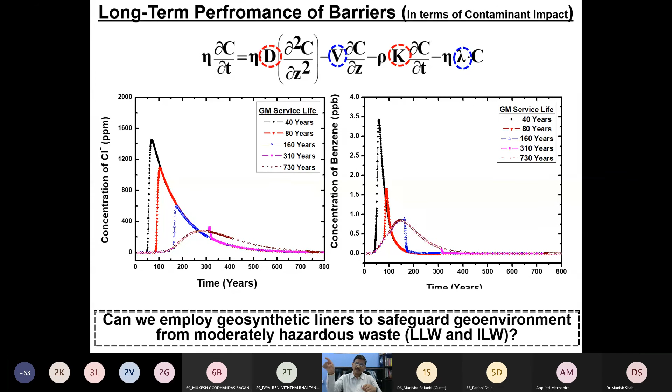Is that answering your question? Hello, yeah. Sir, what about the heavy metals which have already leached out? And let us say our liners have the capacity to retain those metals, okay, then what further exercise can be done, I know there are many processes where people are extracting these metals and other things.

I think we need to really understand one thing, that we are talking about geomembranes here, not compacted clay liners. When you come back to heavy metals, the retention of heavy metals only happens in either the compacted clay liner or GCL. In general, the geomembrane will not have any ability to hold or absorb heavy metals. Geomembranes can take some amount of organic compounds, but not heavy metals.

Imagine that in a given height of the landfill, a given composition of waste, you know the mass of contaminants present in the waste at the first place, and you know how much amount is leachable out of the waste. Now all these leachable heavy metals might have entered into the leachate over a period of time.